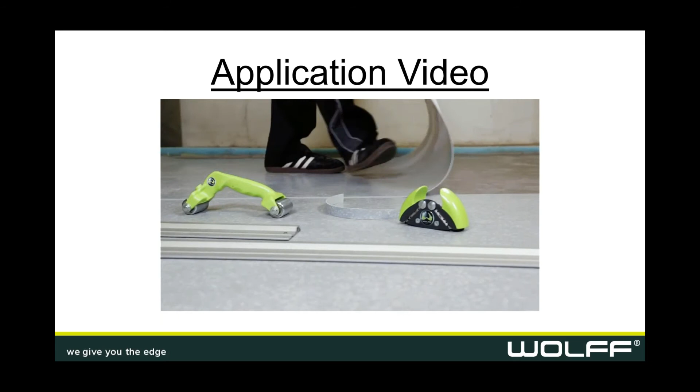In this one, it looks like we're using our pressure roller, but what we're doing is a double cut on some vinyl, probably some linoleum. The installer is cutting a couple of pieces, so he put the track on, and now we're going to adjust the blade to the proper depth for the double cut. It's just one screw and the blade can slide down, so you can make that depth whatever you want, up to a half inch.

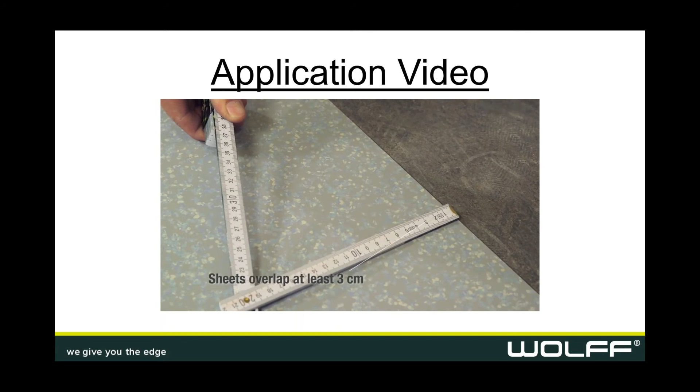If you want it to cut through, you can, but remember, we're doing the same thing we did before with our blades, we'll be hitting the concrete. But if you wanted to score it, a deep score, you can do that.

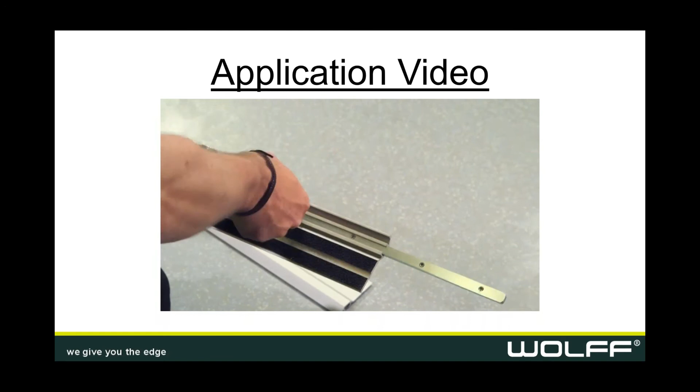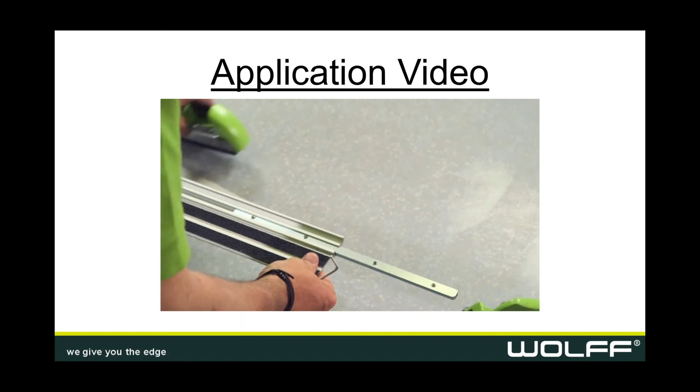What he's showing you now is how to attach the additional rails so you can make longer cuts. And that little black marking on the back, that's our traction grip, so that's what holds it down to the floor so it doesn't move.

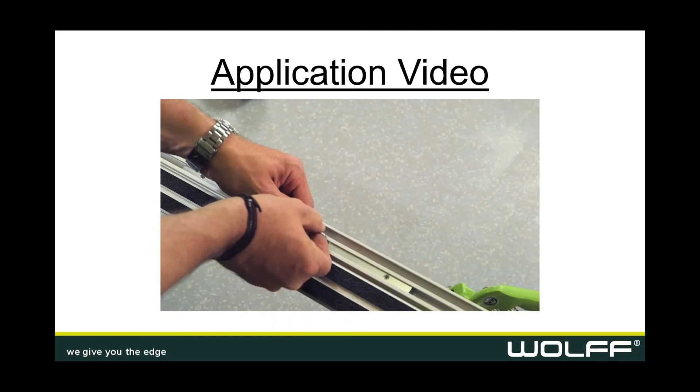He's taking his time, he's doing a really good job at that. I've had a very short-lived career with the rail cut, but I'm learning more and more about it. It's a really cool tool.

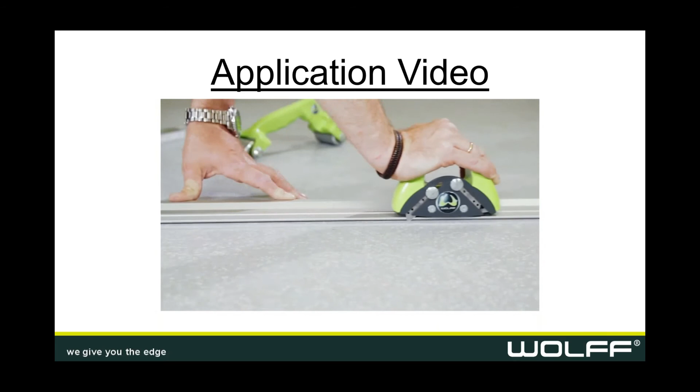As you can see, we're getting the double cut now, and the rail cut can actually go from wall to wall. As you see on the blade side, there are 2 spots for blades, so you can actually get it all the way to the wall.

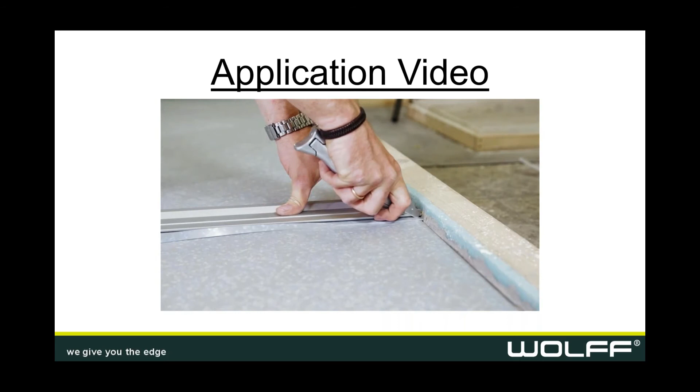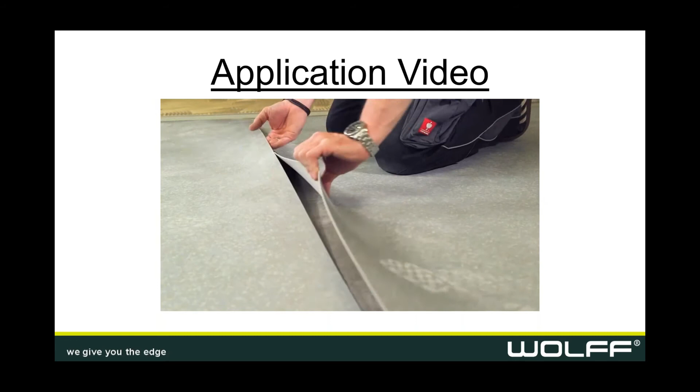He's actually opting out and using his Wolff knife. Yeah, you see that, the old Wolff knife. But he cut all the way from the wall back to where we stopped, and now it's going to go back and do a little undercut here, and you're going to see how it brings you right up to a tight seam there.

Nice and clean, very easy.

We've got some pointers here about the productivity of the rail cut. But before I touch on that, I had my first run-in with the rail cut.

I got a tool in my van, let me run grab it. So I went to my van, grabbed it, and brought it to him. And I was like, I don't know if it's going to work or not, I'm saying this to myself. But when I walked in with it, I was like, yeah, here you go, you can use this.

We set a couple tiles down on the floor, and the rail cut straight through it. Inside, I was like, wow, I didn't know that could do that. But outside, I was like, yeah, see, I told you it could do that. It actually surprised me, it blew my socks off. That was one of my first times using the rail cut and being introduced to it with rubber, and it kind of floored me.

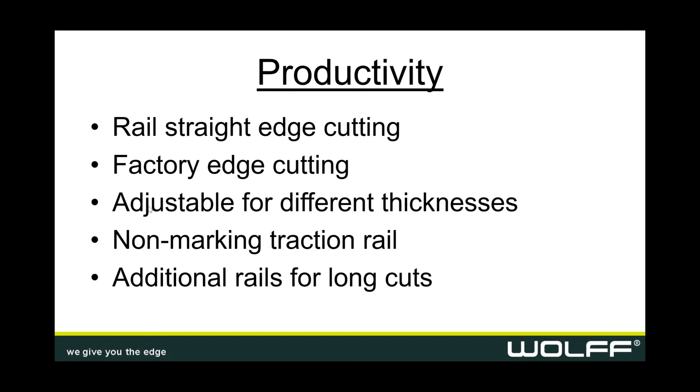I sent one of these over to a guy of mine, Brent Fike, who is the general manager of technical over at Roppe, and his testimony was: love it for LVT, rubbers and sports floor, and I would say an installer needs one. It's a phenomenal tool to have.

Once I got familiar with it, I was kind of blown away with it. Like I said, to recap on the rail cut: Easy Glide rail cutter, various material, you can do carpet tile with it.

What is safety first to you? You're not cutting off fingers. Guys are cutting much quicker. Like I said, I was using it for zip tile. Three cuts is when you're through. That's known throughout the industry when you're cutting rubber flooring.

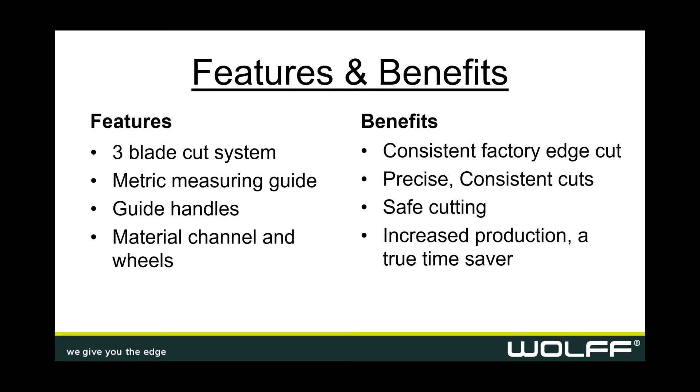You can use it for vinyl sheet goods, LVP, planks, tile. You can cut strips for stairs, risers—I've had guys use it. I had a guy use it for a material he wanted for a straight cove base, and it kind of freaked me out, but it worked. He cut a 4-inch cove base out of his material, and it worked just fine for him, with a consistent 4-inch cut every single time.

It's such a versatile tool. You can cut borders with it. What about inlay strips, feature strips? You can do all those different styles of cuts with the strip cutter. Another fun thing you can do in certain applications is if you're working with a wood grain or wood plank style grain of roll goods or sheet goods, you can take the strip cutter, set it on a certain plank run, and rip that cut every time.

I was with my guys up at Gerflor, and we cut some strips and called some of the guys in, and they walked right past the strips we cut on the floor because they matched the floor identical. I've used it on Omnisports from Tarkett, Altro, Armstrong, Roppe. The cutter is just one that guys absolutely love. You can also, if you're a guy that likes the hook blade cut better, we have an attachment for a hook blade.

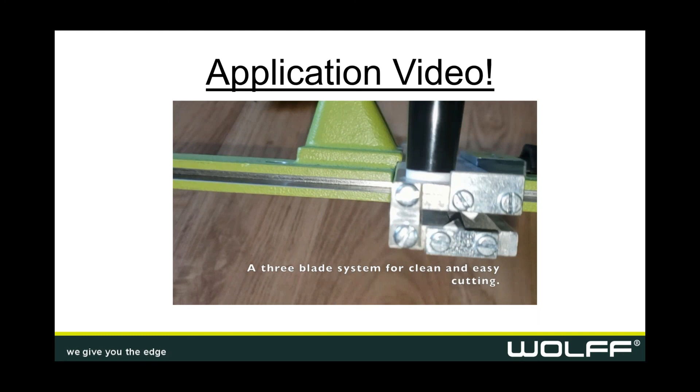Here we've got a little video and we're just gonna show it cutting. Right there, you can see the 3 blades, the top blade, the undercut, the cut through, and those couple holes on top where you can see the material going through.

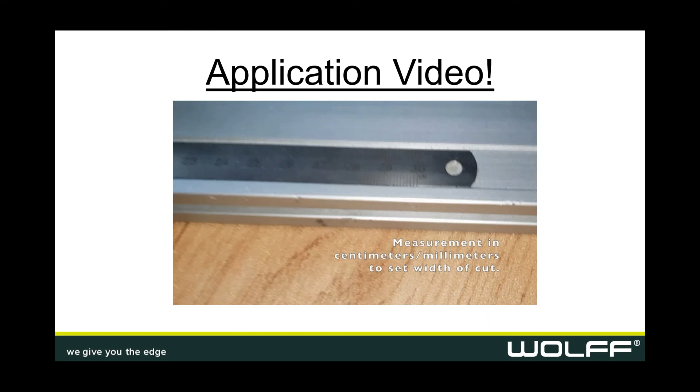It pretty much just pulls the material through the cutter. It's so cool to use it. There's our guide handles, and that's how it rolls so easily on the rollers that are there.

Smooth cut. So what I did was I showed the traditional way, your way of cutting it, the way the guy's been doing it. Grandpa taught me, his grandpa taught me, and so on and so forth. We lay down our straight edge, and that's yours truly in the picture wearing my Wolff gear. But it's so much work involved in this part. We make our line, and of course we have to speed it up because it takes so long.

You had to line it up, come back with a knife, and cut it. Whoop, I made a mistake there because I went offline with my cutter. So then let's show it with the strip cutter.

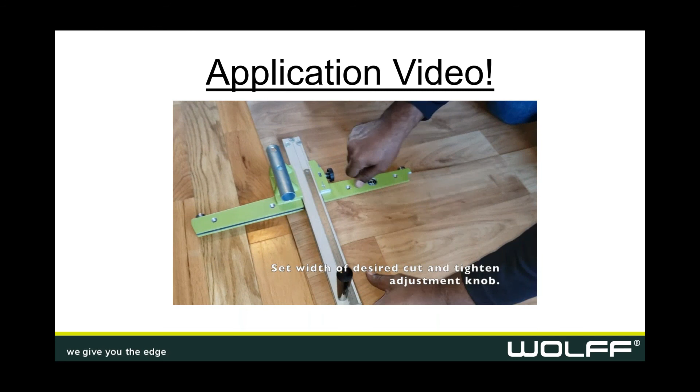Let's set it to size and get the material in there, nice and easy. Let's get the blades on there, get it fastened into whatever size I want. I can adjust it, and I actually put it on a plank seam there. Get it nice and set and pull through.

When you talk about ease, again, warm butter with a hot knife. I mean, you can't cut that easy, that quick. It's just a phenomenal cut. Guide it on through.

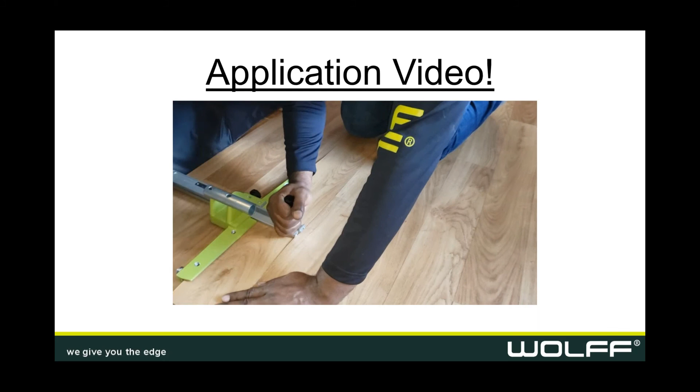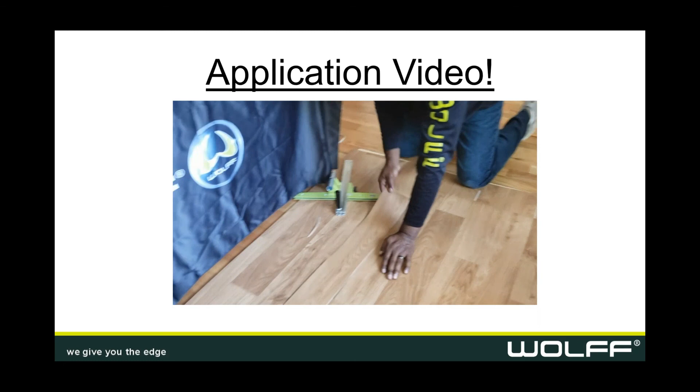Good for, you know, I'm showing a pattern there so I can set, if I want to get a trim piece of a certain plank out, I can cut right down that line. Then I can come back and set it into where I need the new inset to go. Nice and easy.

So, productivity with the strip cutter: one pass through the material. What does that mean to you? That means once we get the material in, we can slide the cutter straight through. There's no hesitation, no pull, no hang up in the material with the cutter. It's a factory edge cut, so my knife isn't going back and forth like what I did in the video where I got offline from my straight edge. It's a straight cut, and it's going to give you that factory edge, nice and clean.

Plank cutting, like I did in the video, I cut one plank out so I can do an inset or a border. Precise width cutting - I set the measurements up to exactly where I wanted it to, and every cut is going to be that same cut every single time. And of course, it eliminates the straight edge.

It becomes one of our safety first tools. Safety first - I no longer have to worry about cutting my fingers, constantly changing blades, which can open up more cuts on my fingers with those exposed blades. And then lastly, and I think it's more important to me, is I've got my guy off his hands and knees in half the time of the traditional way.